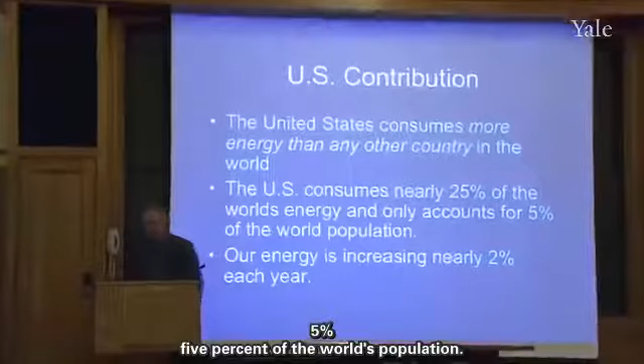Keep in mind also that the U.S. consumes more energy than any other country in the world, and U.S. consumes nearly 25% of the world's energy and only accounts for 5% of the world's population, so that our energy demand is increasing at about 2% per year.

So why might that be? I mean, obviously we're changing our behavior, we're changing our technology and our dependence on technology, and also the environments that we shape around us have enormous implications for energy that often are not well understood for a variety of reasons.

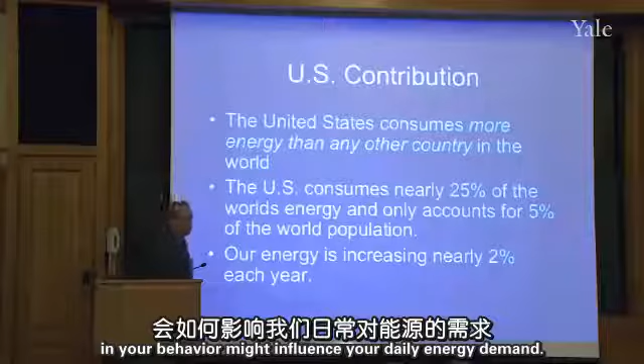You, for example, probably have no understanding of how your daily behavior and variability in your behavior might influence your daily energy demand. The way that you manage your computers, the way that you manage your windows, your air exchange between indoor and outdoor environments, the way you manage lights, whether or not you have a car on campus. If you do, how often you use it, where do you park it, what's its fuel efficiency. So thinking about how to keep track of an individual's energy demand is really not in most people's minds clearly defined.

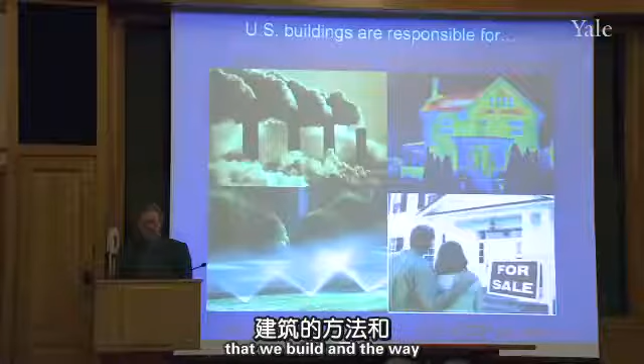As I just said, the contribution to the climate change problem and our dependence on foreign oil is really very much dependent upon the way that we build and the way that we set up standards to encourage energy efficiency. So 39% of CO2 emissions come from the building sector, 40% of total energy consumption, 13% of water consumption, and about 15% of the gross domestic product per year is associated with the building sector.

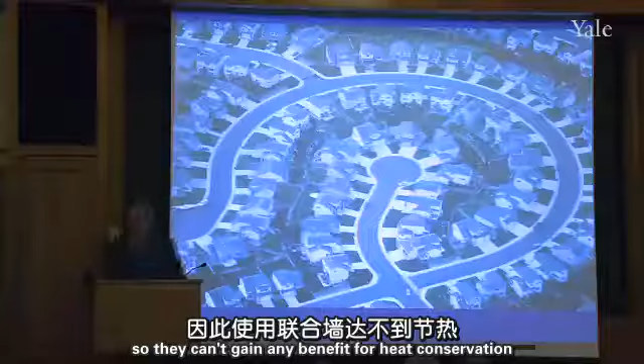Think about the different patterns of growth and how the different patterns of growth and neighborhood development influence the way that we use energy. These houses are not connected, so they can't gain any benefit for heat conservation by having joining walls. They all have their own yards.

And in fact, if you think about how people move around in these kinds of neighborhoods, you'd realize that because of the fencing in the backyard and without gates that go between all the different lots, it would be quite normal for somebody to get in a car and then drive all the way around the block to take their kids to somebody else's house that might be less than a baseball throw away. So patterns of development encourage patterns of transit that have just an enormous influence on the way that we consume electricity, but also petroleum products.

So think also about the cities in the nation that during the 1990s and over the past decade have experienced some of the most rapid rates of growth.

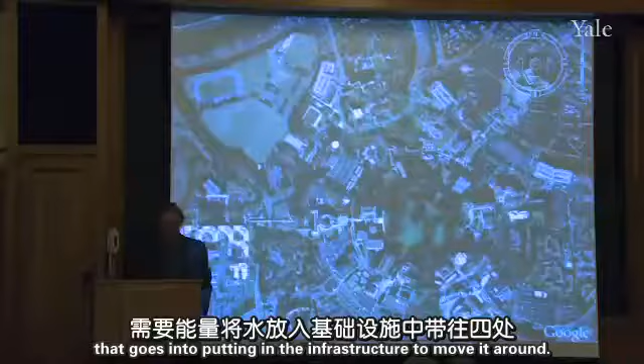These include Las Vegas, which is expanding into the desert in a manner and at a density that is suburban, it's sprawling. But it's unusual in Las Vegas because of the arid environment, so that every house would likely have a lawn. The lawn would require sprinkling. Many of these houses, once they're built out, would also have swimming pools. So think about the way that the use of water demands energy to not just move it around, not just the distribution, but also filtration, and also the energy that goes into putting in the infrastructure to move it around.

On Thursday, I'm going to come back and talk more about the New Town movement in the United States and this problem of managing growth at a larger scale than today's lecture, which is really focused on individual buildings. But it is interesting that a movement evolved in the 1960s and 1970s in the United States to design neighborhoods, to design whole new communities in a way that would take into account some of these problems.

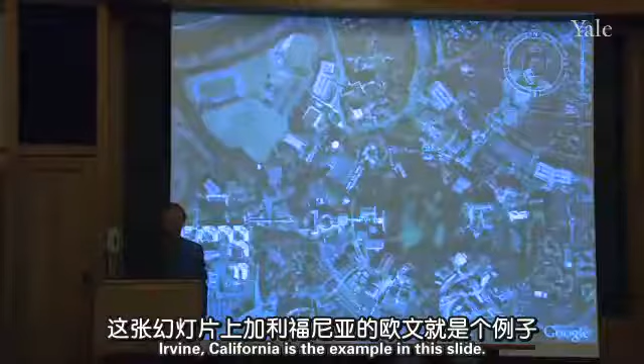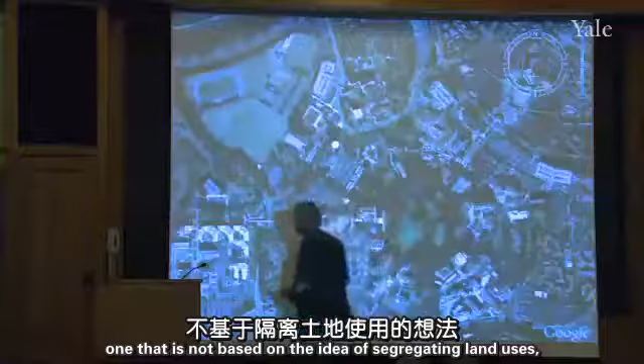Irvine, California is the example in this slide. You can see the center of the campus, with large academic buildings surrounding a green in the center. In the adjacent areas you have recreational facilities, but also higher density housing nearby. It's a very walkable community, one that is not based on the idea of segregating land uses, commercial versus residential versus industrial versus recreational, the way that in suburban Connecticut you put your kids in a car and drive from where you live to where you work, to the recreational area, to dance lessons, whatever it is. This community was intentionally designed back in the 60s and 70s in a way that would provide for mixed land uses and offer opportunities for much increased pedestrian traffic.

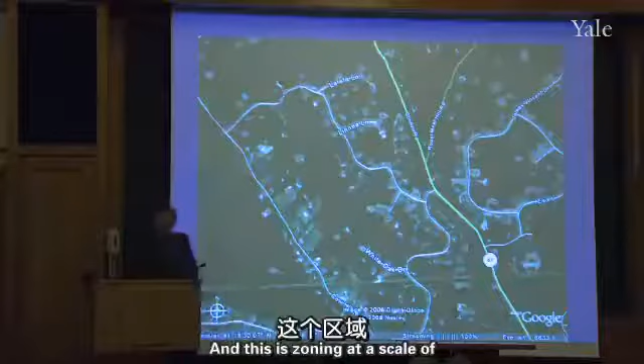As opposed to suburban areas around New Haven, here's an example of a community about 20 miles away that many of my colleagues live in. This is zoning at a scale of about 1 unit per 4 to 5 acres. Each of these houses has a strip of land that reaches back from it into an area that might otherwise be a common open space. This low-density development demands even more time spent in cars and more fuel. A good example of a house in a more rural part of Connecticut.

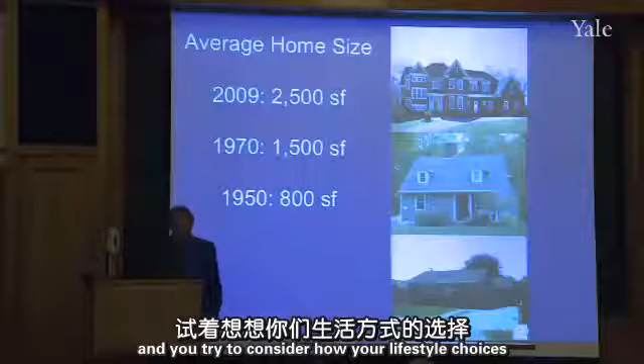So keep these things in mind as you're thinking about your own behavior, the way you grew up, and try to consider how your lifestyle choices influenced your family's consumption level.

Also, I want you to think about the idea of size and how we are increasingly dependent upon many consumer products in our lives that are larger than they used to be, and housing is no exception. The average house size in 2009 has grown to about 2,500 square feet, with about 2.3 people per house on average. That's really pretty remarkable.

Roughly 1,000 square feet per person, whereas back in 1950, the average number of people in a house was much closer to 3, a little bit over 3, with a post-World War II baby boom, and a total house size of 800 square feet. So house size has grown by threefold. In 1970, it grew to 1,500 square feet.

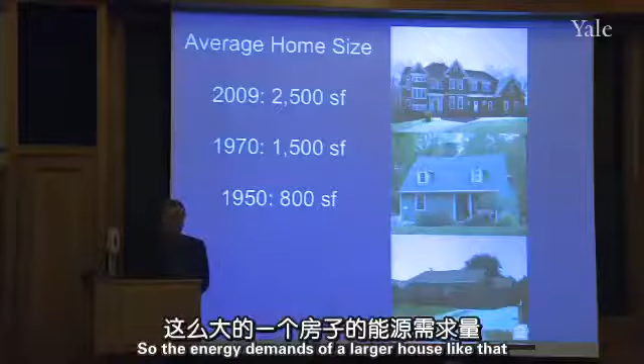So the energy demands of a larger house like that are actually quite difficult to predict if you try to take into account the diversity of building materials.

Boy, I apologize for this—one of you might go outside and let them know there's a lecture going on in here. That would be really nice. The construction is also creating diesel fumes inside the building.

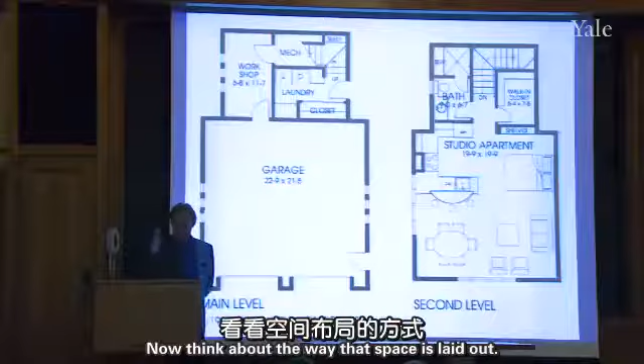Also, many buildings are now constructed with much more glass in them than previously.

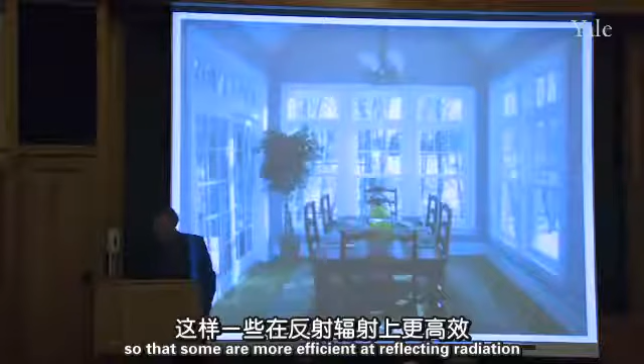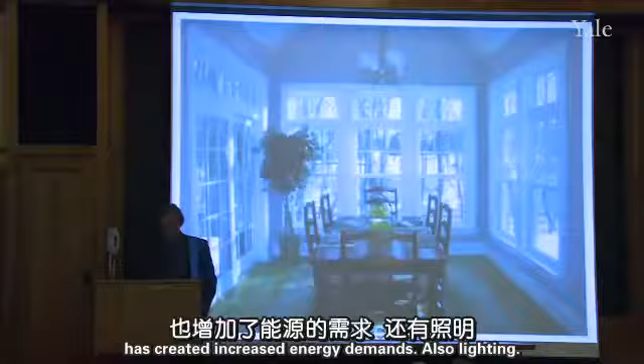The newer high-end buildings are using special glass designed to reflect radiation so that it's not absorbed. Different glasses are designed for different climatic regions—some are more efficient at reflecting radiation and are used in warmer southern climates, while others are more efficient at providing insulation, with a barrier on the interior that protects against heat loss. Overall, though, buildings' increased use of windows has created increased energy demands.

Also lighting, and also the way we have increasingly designed bathrooms to have more than one fixture. Here's an example of a shower stall with multiple shower heads and multiple faucets, so water demand is often increased in bathrooms designed like this.

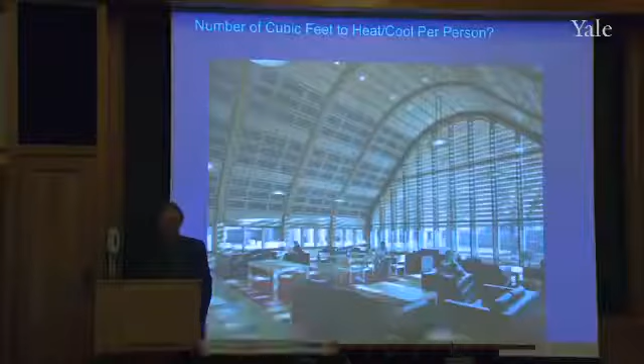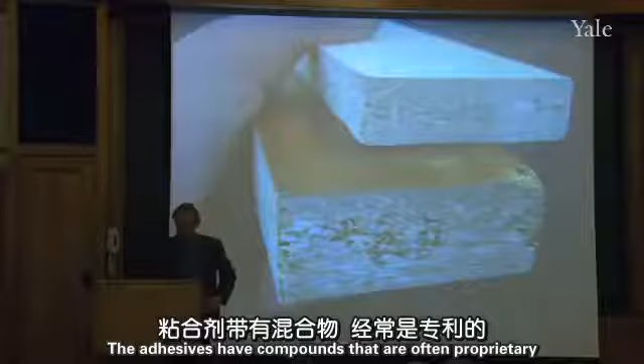So what's beneath the veneer? Here you can see a strip of press board faced with a white oak surface, but the interior is basically low-grade wood chips of a variety of different species compressed together. They're mixed in liquid form with adhesives, then rolled out on a strip and cut into different sizes. The adhesives have compounds that are often proprietary and even unknown to most who purchase or sell them at building supply houses.

They commonly contain adhesives that are epoxy resins, some of which contain bisphenol A, which we talked about earlier in the course. Formaldehyde is also a component commonly used, which is an allergen and a suspected carcinogen. I'd like you to think, too, about the problem of your understanding.

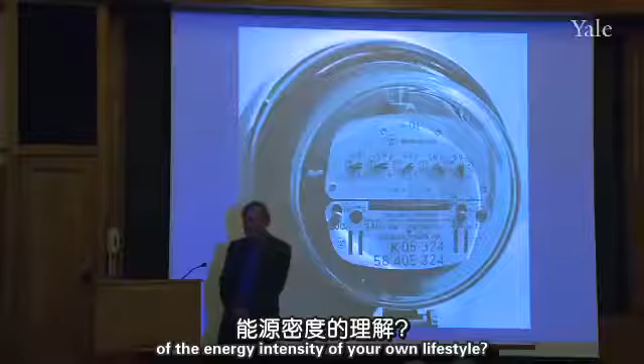How could you increase your understanding of the energy intensity of your own lifestyle? Here's a pretty good example of how houses built in the 1990s and earlier are metered, at your utility junction box where the line comes in from the road. This is my meter—I have the same brand—and it's got five dials on it.

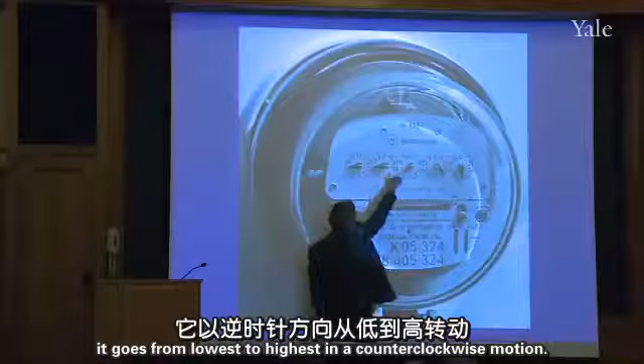You might think that's not that tough to figure out, but if you walk up to it, you'll see the dials actually have numbers where the first dial on the left goes from lowest to highest in a clockwise motion, but the second goes from lowest to highest in a counterclockwise motion. So they switch as you move across. This is actually a very difficult thing to keep track of.

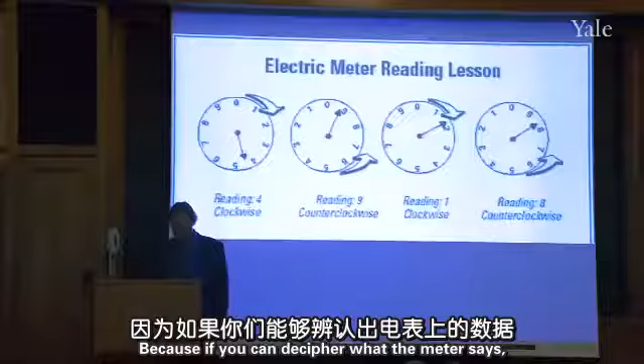You might wonder how your variance in behavior—how you manage your computers, lights, water consumption, or how big a refrigerator you have—affects your electric bill. It's really hard to figure out given this kind of metering system, because if you can even decipher what the meter says, you'll only get a total figure for your consumption. This has created an opportunity for people to design smart meters that keep track of energy intake and use, and how it's distributed in a house for different purposes.

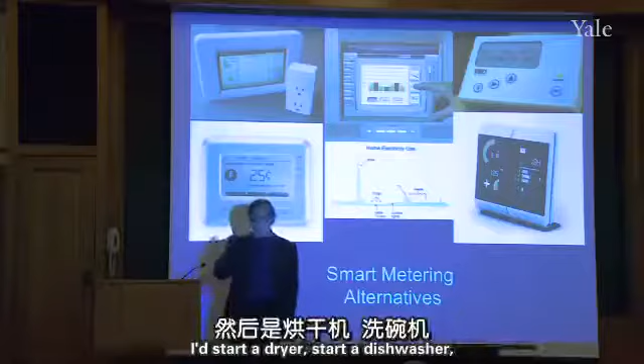I tried to figure this out given my dial meter at home, and ended up turning off absolutely everything in the house and then starting up appliances one by one—starting the refrigerator, then turning it off, starting a dryer, starting a dishwasher, but only one appliance running at a time. Every time you plug one in, go out to the meter, take a reading, come back, unplug it and plug in something else, it takes a very long time to figure out where you're spending your money.

By doing that over a period of about 8 hours, I was able to save about 25% of my average monthly energy bill by figuring out how to restrict access to or fully turn off different appliances in the house.

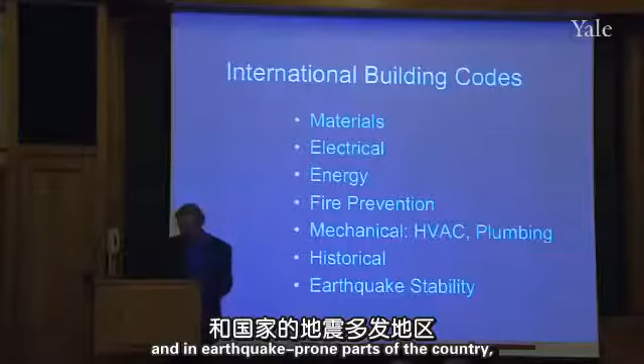Building products and building construction are normally regulated by a variety of building codes, many of which have been adopted internationally. These codes apply to materials, electrical systems, energy sources, fire prevention, mechanical heating and ventilation and air conditioning systems, plumbing. They even apply to historical sites, and in earthquake-prone parts of the country, there's a distinctive code, like in California, for earthquake stability.

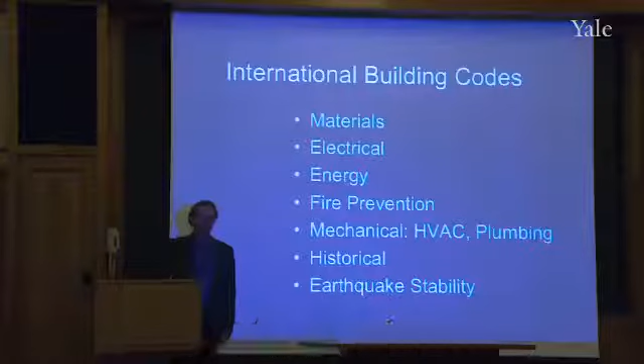These codes evolved originally as voluntary, so they were not formally adopted by state or local governments, but now most states have similar kinds of building codes. They were originally designed to promote understanding of the functionality, safety, and durability of different kinds of products, also to promote truth in labeling, but they were never really designed to promote environmental responsibility, health protection, or energy efficiency.

So the green building movement was really ripe for a brand new certification system that would apply a variety of different kinds of standards. The three programs I'll mention today include the LEED program by the U.S. Green Building Council, the BREEAM program in the United Kingdom, and the Green Star program in Australia.

The BRE Environmental Assessment Method is perhaps the best known in the world right now, and it's the most widely adopted throughout Europe. It sets standards for best practices in sustainable design and has become really a de facto measure used to describe a building's environmental performance within the European Union.

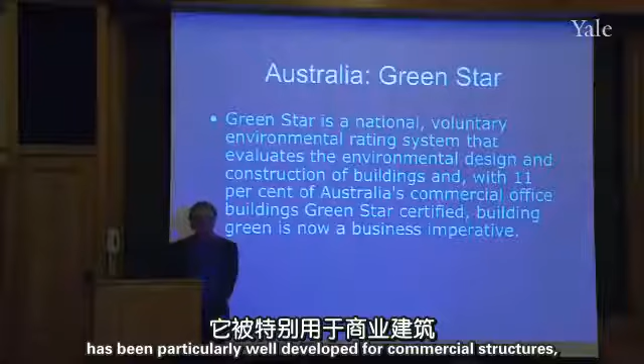Australia has the Green Star program, which is national. It's also voluntary, and it evaluates construction and environmental design. It's been particularly well developed for commercial structures, especially office buildings in downtown districts, where about 11% of buildings have been constructed and certified under the program.

Its purposes are, first of all, to try to figure out a common language and common definition for what green is. Before the National Organic Food Standard was adopted, there was no national consistency in the definition of what organic food was—it varied by certification scheme.

The Green Star program also sets measurement standards, so there's a common approach to measuring, say, energy consumption or the capacity of different building materials such as electrical conduit.

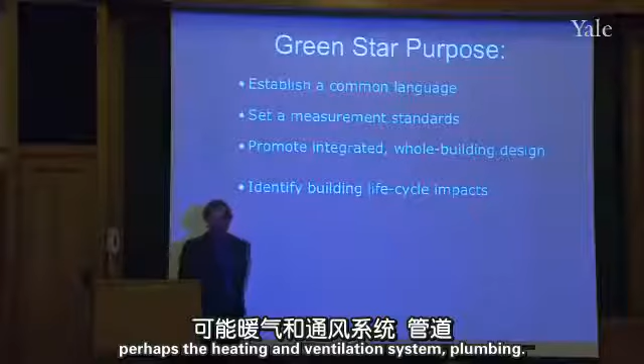They also promoted whole building design, so one would think about not just the individual components or building materials or the different systems—by systems I mean water supply, electrical supply, heating and ventilation, or plumbing—but figure out how to put all these components together in a way that would minimize the long-term adverse effect on environmental quality, human health, or energy loss.

This idea that one would think about building materials and the style of design in a way that would consider the ultimate product life cycle is really a pretty new idea in the building industry. So what's going to happen to that PVC pipe that exists in your house when your building gets torn down? What's going to happen to the copper piping that delivers the water?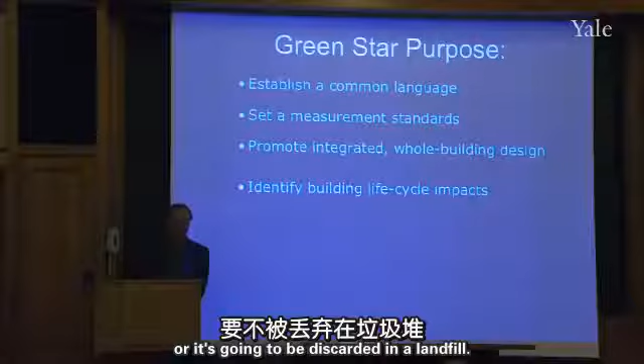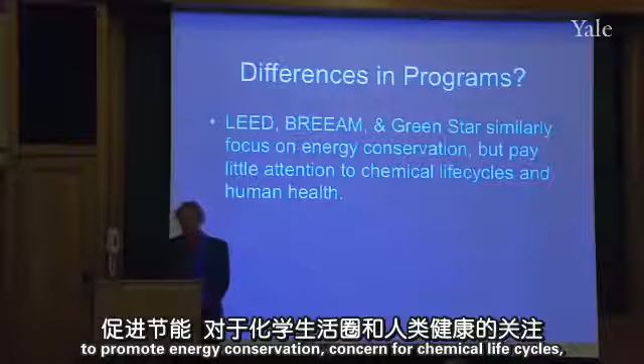The PVC pipe, you can almost be assured, is going to be either burned or discarded in a landfill, but the copper piping is highly likely to be recycled because of its market value. Differences in these programs are normally associated with the way they allocate credits or points to buildings for different purposes, but they're quite similar in their attempt to promote energy conservation, concern for chemical life cycles, as well as human health.

The Green Building Council evolved beginning in 1993, and this is what I want to focus on now for the remainder of the session. It's a voluntary, nonprofit organization with no government affiliation, although it was started by a grant from the U.S. Energy Department. It was created with a board of directors that includes people with expertise in architecture and engineering, as well as some of the largest development and construction firms in the nation.

There are really not a number of people on this board or on the staff that have deep environmental or health expertise, and its orientation has predominantly been to promote energy efficiency.

They claim that the benefits of Leadership in Energy and Environmental Design, which is what the LEED acronym stands for, has three predominant purposes. One is to promote environmental quality. The second is economic development, to basically stimulate a new type of building and new building materials that are more environmentally responsible.

And also to promote healthy lifestyles within buildings and communities. By healthy lifestyles within a building, I'll give you one example.

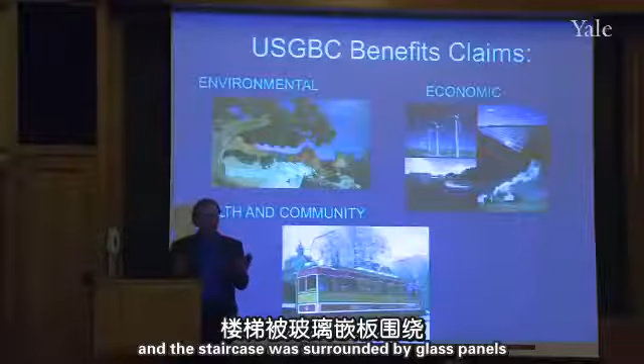A colleague of mine works at the Centers for Disease Control in Atlanta, and they have a relatively new building. As a healthy lifestyle attribute, instead of putting a staircase in the back of the building and the elevator right near the front door when people walked in, they decided to reverse that. The elevator was put in the back, and the staircase was surrounded by glass panels that made it really light, with sunlight streaming through and attractive, so that people, when they go into the building, normally walk up the stairs, in a 7- or 8-story building.

This individual who directed the National Center for Environmental Health told me that he and his staff, nobody uses the elevator. Everybody goes up and down the stairs, so it saves energy. The elevator's not used much, and it's also healthy. It's burning up calories.

The purpose of LEED falls into a variety of categories. One is sustainable sites, another is water efficiency, another is energy and atmosphere, another is materials and resources, the fifth is indoor environmental quality, and another is creativity and innovation in design. You might imagine different categories might be a part of a system such as this, but there are interesting questions about the relative importance that these categories should be assigned.

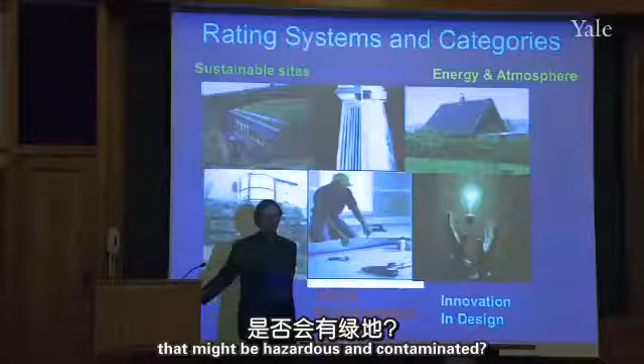Should you be assigned as much about the nature of the site that's chosen for building, whether or not it's remote and is going to be in a greenfield area, as opposed to a site that might be hazardous and contaminated? Kroon Hall, up on Prospect Street across from the Whale, was built on a highly contaminated site, where a former power plant was located.

A lot of work had to be done to clean that site up, to remove contaminated debris, as well as other infrastructure, the heating and electrical and hot air conduits that go from the power plant up to Science Hill, particularly Kline Biology Tower.

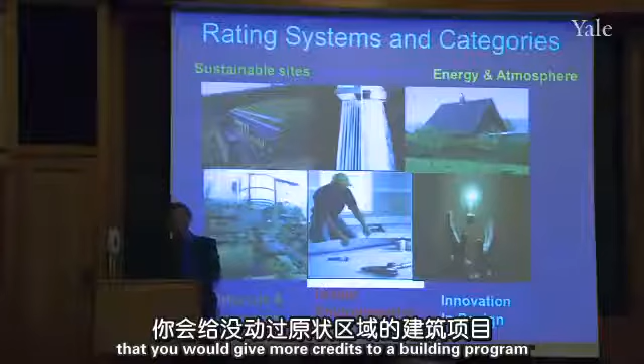So the idea is that you would give more credits to a building program that would not chew up undisturbed areas that are in, say, the suburbs. You'd give more credit to those that were actively going to restore sites - that's an interesting concept.

The certification program that I'm going to talk about today has to do with new construction and renovation, although there are other programs that LEED has, for example, a program for schools, a program for homes. In this program there are 100 base points plus 10 possible bonus points, and there are different levels of certification that can be achieved.

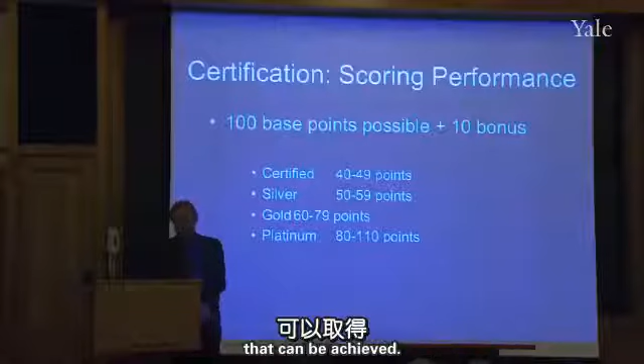If you achieve 40 to 49 points, you are certified. Up to 50 to 59 points, you're given a silver certification. Gold is 60 to 79, and then platinum is 80 to 110 points. You could imagine a variety of different strategies here that would hold the bar higher for the base level of certification, or perhaps hold the bar higher for only the platinum level. The Kroon building was just certified to be a platinum building as an example.

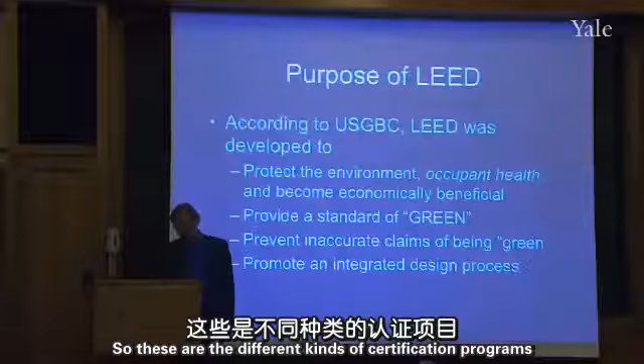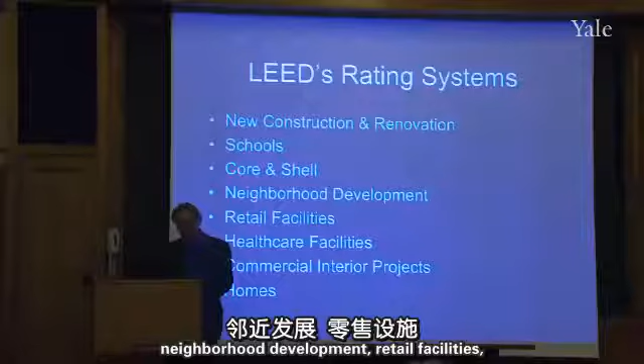These are the different kinds of certification programs that LEED has beneath its umbrella. As I mentioned, the first one, new construction and renovation, is the subject of today's talk. But there's also schools, core and shell components of buildings, neighborhood development, retail facilities, healthcare facilities, commercial interiors, and homes.

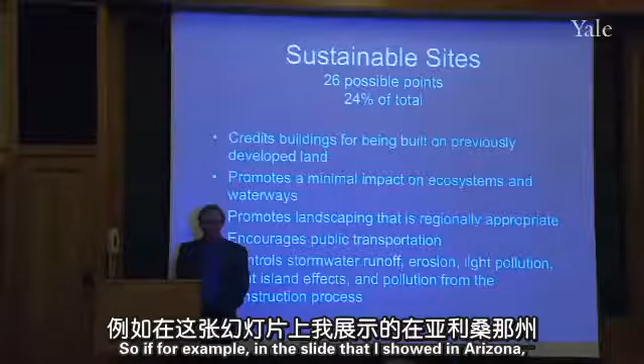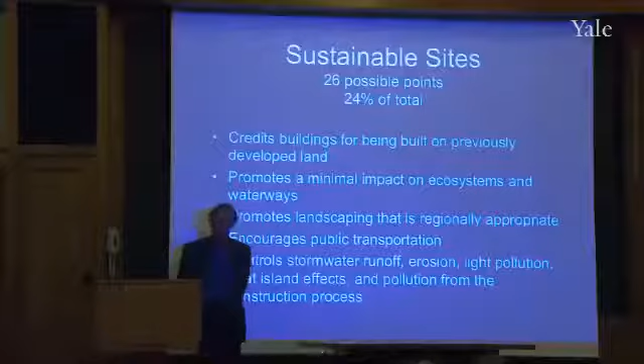For example, in the slide that I showed in Arizona, if you were trying to get LEED certification for a new project, you would need to be very careful about the kind of landscaping that you put in, making certain that it wasn't water dependent. Whether or not the building site encourages access to public transportation, so proximity, say, to a rail station, would improve the number of points. The control of stormwater runoff and erosion - as an example there, Kroon Hall has a very large gutter that overhangs the south side and funnels water down into that water garden that is on the eastern side of the structure.

And then that water moves through a filtration plant inside the building and is recycled into gray water, so that it's used for removal of human waste in the bathrooms.

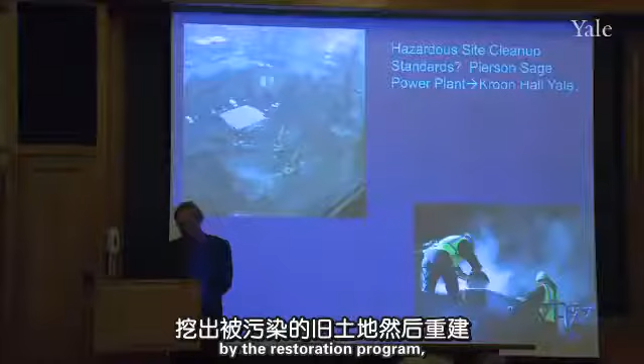Here's an example of how that building achieves certain points through the restoration program, digging out the old contaminated lands and rebuilding. For each of these categories, you can achieve points in different directions, and the way these points are allocated category by category could have a significant implication for providing encouragement.

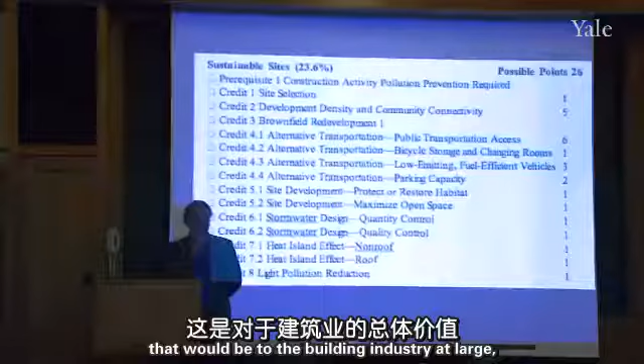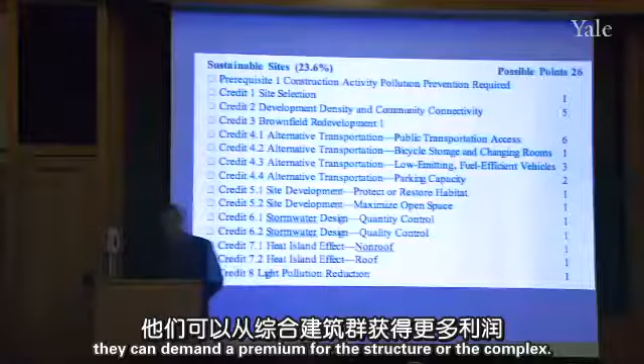By the way, why would a developer want to be LEED certified anyway? What's the value? Well, one value would be to the building industry at large, creating an incentive for a new line of products and a new approach to building design that would create jobs and cause the industry to grow generally. But most developers are in this because they know that if they achieve certification, the property value is higher—they can demand a premium for the structure or the complex.

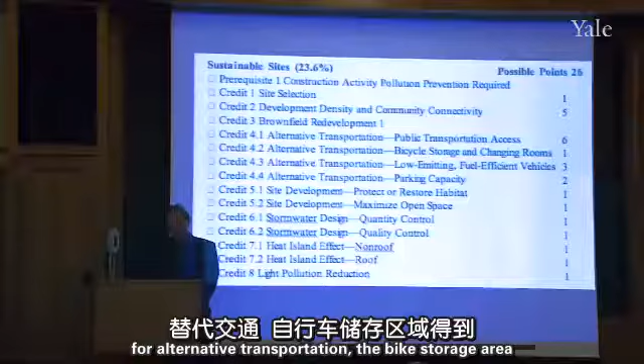In this case, the sustainable sites category allows one to seek about 23% of the total number of possible credits. These can be awarded for brownfield redevelopment, for alternative transportation like the bike storage area you find behind Osborne Laboratory, which caused FES to gain additional points, and for management of stormwater and trying to reduce the heat island effect by creating green roofs. There's a green roof on part of that site.

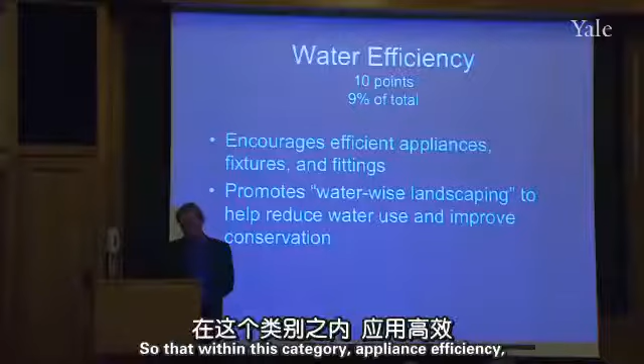Water efficiency also is a source of possible points, about 9% of the total. Within this category, appliance efficiency, fixtures and fittings are good examples of different ways of saving water, as well as the landscaping I mentioned earlier.

I wanted to mention a couple of relatively recent technological designs. One is these leverless faucets that sense your presence either by an electronic eye or by sensing heat, which causes them to turn on and off.

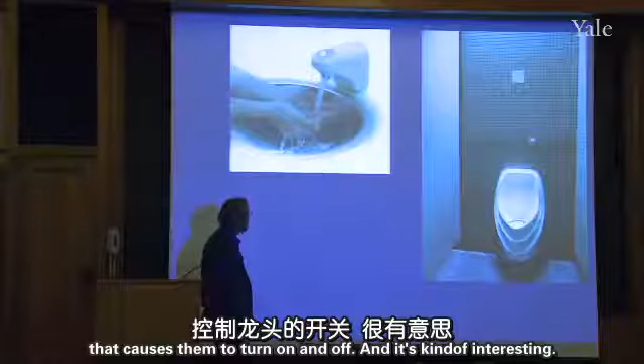I've become more curious about this and watch people's hand washing behavior, particularly in places like airports. It's really common to have a whole array of these faucets on a countertop, and people often have to move from one to the other to get one to work. After that happens a number of times, I think people are more likely just to not wash their hands, so there's a sanitation problem potentially associated with it.

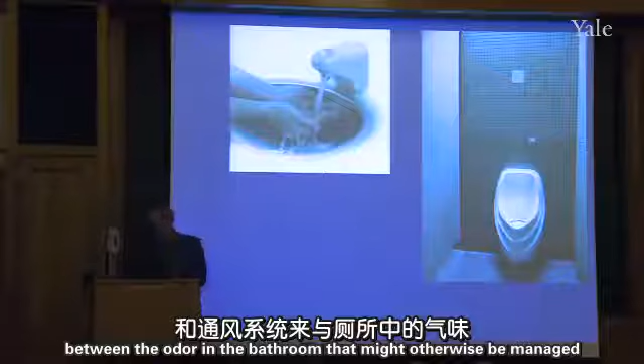If you go into the men's rooms and look at the flushless urinals, you'll immediately recognize there's a serious problem in Kroon. It's led many to argue they'd rather make the trade-off between the odor in the bathroom and improving the heating and ventilation system. Right now, no water is used in this toilet—only a synthetic compound is put in to try to maintain its sanitation, but it often isn't as effective as promoted.

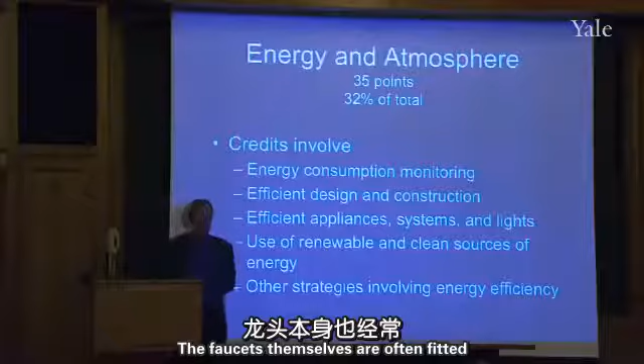Water efficiency can be achieved in a variety of ways. The faucets themselves are often fitted with restrictions in flow, so if you're interested in taking a more powerful shower, you'll need to figure out how to get the flow restrictor out, which many people do try.

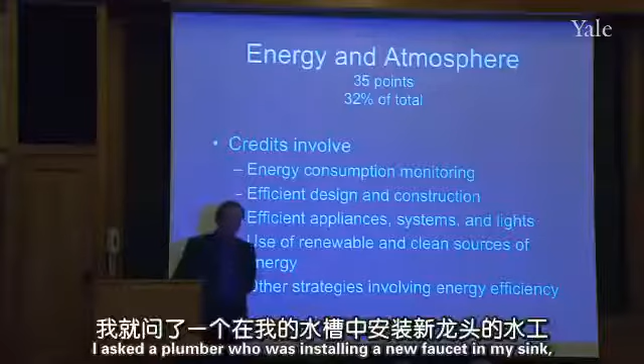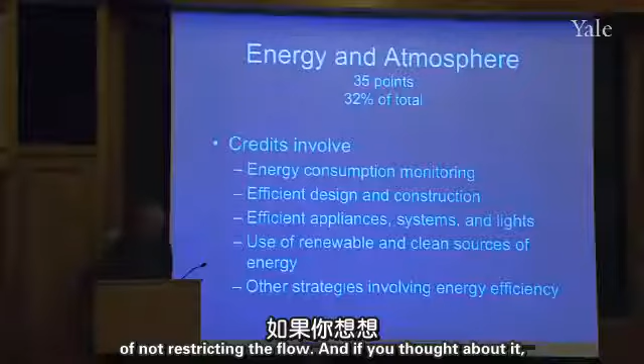The flow restrictor itself is governed by local and state building codes, and it was an education for me when I wondered about this. I asked a plumber who was installing a new faucet in my sink, and I said I'd really like a larger rate of flow so I could be more effective in washing dishes or whatever. He said, well, you really don't understand the energy implications of not restricting the flow—if you thought about it, you'd realize the energy costs are really quite high to move the water to your home.

I said, well, I've got my own well. He said, well, think about where the energy is coming from that causes your pump to lift the water 600 feet.

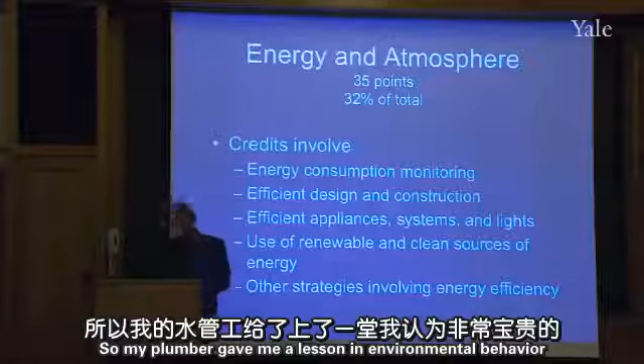And think about the more water that you use, the more waste you create, so you're likely to disperse biological and chemical contaminants more broadly. So my plumber gave me a lesson in environmental behavior that I thought was quite valuable.

The highest proportion of points or credits are awarded under the LEED program for energy and atmospheric concerns, so that new buildings can obtain points by monitoring energy consumption, and this is being pretty carefully done in Kroon Hall as an example.

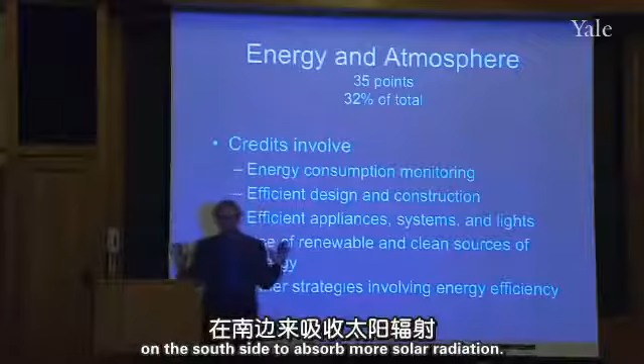The orientation of the building at Kroon is facing east to west, so that it has more window space on the south side to absorb more solar radiation. It also has solar panels that run across the south side, and a variety of other saving techniques.

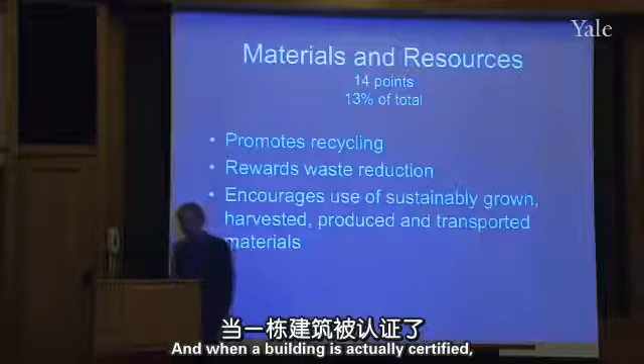So the dominance of energy and energy conservation in the LEED certification and credit program relative to these other categories is quite interesting. With respect to materials and resources, the management of waste is also more intensely monitored within a LEED certified building.

And when a building is actually certified, it's not certified forever. It's certified for a fixed period of time, often only a single year. A building is not certified until it can demonstrate that it performed at a certain level during that year. So it's kind of an interesting idea. If a building's heating and ventilation system malfunctions, then a year or two down the road, it's not going to be recertified.

Indoor environmental quality is increasingly a concern, and only 15 points compared to about 34 points in the energy category are allocated for indoor environmental quality. Now, what does that mean?

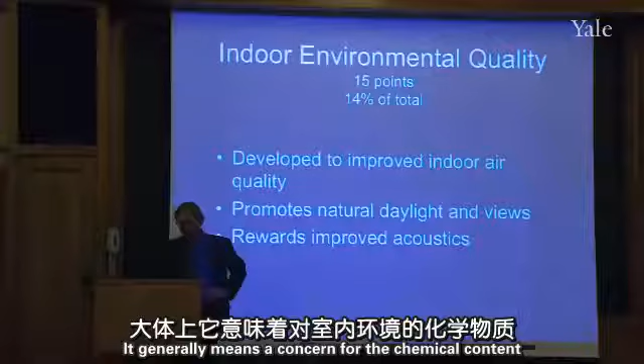It generally means a concern for the chemical content of the indoor environment. But it also includes the opportunity to gain points for natural daylight and views, and also for acoustical control, noise control, so that the situation we're experiencing here might be avoided.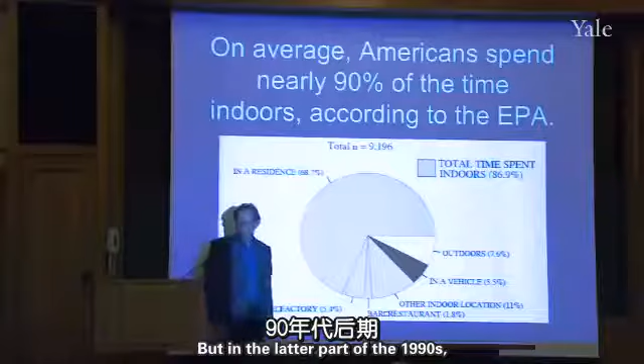Think about the importance of this in terms of human chemical exposure, given the fact that we spend so much time indoors. This diagram is now a couple of years old, but in the latter part of the 1990s, EPA was estimating that about 86-87% of time was spent indoors. About 5% of time was spent in a vehicle. So thinking about the chemical content of the indoor environment is important, especially for certain subgroups like kids.

This can be managed in a variety of ways, and you could think the ventilation rate or the air exchange rate, indoor to outdoor, is one way of doing that, depending upon where your building is. In general, outdoor air quality is better than indoor air quality, unless you live in proximity to an industrial area or a highway, so that being able to mechanically and individually control windows is an important strategy for managing air quality. But also thinking about a variety of different materials and compounds that are brought into the built environment.

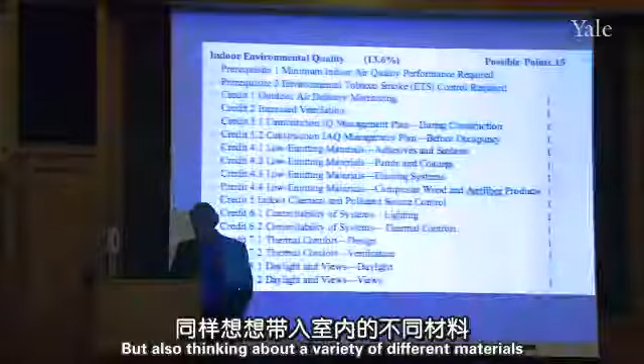Some compounds and some products are discouraged under this program, so that paints, for example, that emit a high level of volatile organic compounds are discouraged. Low-emitting paints, varnishes, and polyurethanes are now designated, so that if you look at the can of an oil-based paint, you'll find that roughly 2.5 pounds of volatile organic compounds are contained, whereas certain paints are now manufactured with no volatile organic compounds.

You might also think about compact fluorescents, which pose an interesting problem in that they contain mercury. This is a piece of personal advice for you: as you install or remove compact fluorescents, be really careful about them, because if they break in your room, it's going to scatter mercury around, and the mercury will vaporize. If it gets into a rug and you vacuum, the rug is going to give off the mercury vapors, and it will increase the volatilization rate, making it just about impossible to completely remove the mercury from the room.

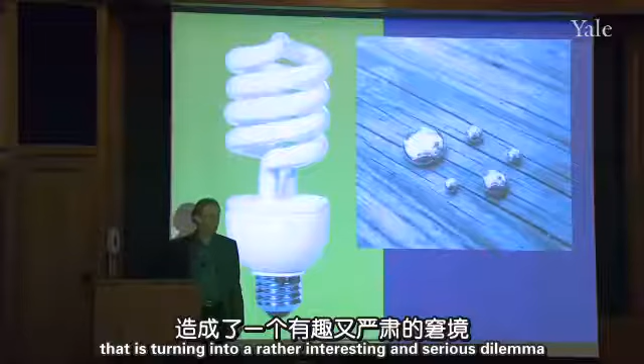This is a problem associated with compact fluorescents that is turning into a rather interesting and serious dilemma for waste management. Not many people really want to take an old burned-out light bulb back to a recycling center, and the probability of getting it there without breaking it is probably not too great. Also think about plastics in landfills — an increasing proportion of the interior built environment is made up of a variety of plastics that we've talked about in the past.

But the extremely low chance that plastics are going to be recycled is a logic to rethink the way that points are allocated. There was an interesting debate inside the Green Building Council about polyvinyl chloride plastics, and whether PVCs ought to be banned, or whether you'd have credits removed if you used PVC as opposed to a more recyclable product like polyethylene, which most soda bottles are made out of. But they decided not to do that, which is quite curious.

So thinking about the kinds of materials put down on floors, the sealants also - this is encouraged. Credits can be gained if you choose not just low VOC paints, but also clear finishes. You'll also find a variety of products, including this type of vinyl flooring you could see in Kroon Hall, particularly in the stairwells, that gives off volatile compounds I haven't been able to identify, and manufacturers are not required to label.

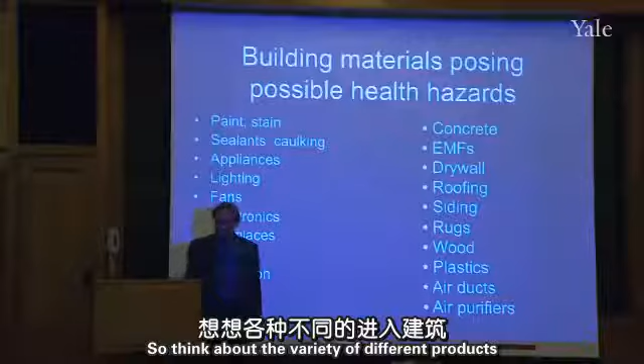So think about the variety of different products that go into purchasing or into the construction of a building, and how these products may change the chemical content of that environment. So the quality of the air exchange system is really critical to govern the chemical exposures that occur, and this is particularly the case in a new building.

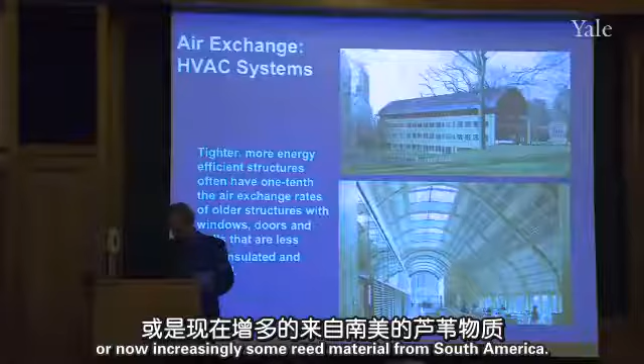As an example, rugs. Rugs may be made out of natural products, natural fibers such as wool or cotton, or increasingly now some reed material from South America. But rugs made out of synthetic compounds and their backing - many are recommending that those be aired out in a warehouse or garage for a period of time, up to a couple of weeks, before they're installed, so occupants of new buildings would not be exposed to those fumes.

A couple of other examples that are not managed by LEED. Certain golf courses have been certified, whereas the expectation on the part of the Green Building Council is that the chemicals used are regulated by the Environmental Protection Agency. And the chemicals used on golf courses are commonly quite a complex mixture. As you remember from the pesticide section of the course, many of these have not been fully tested.

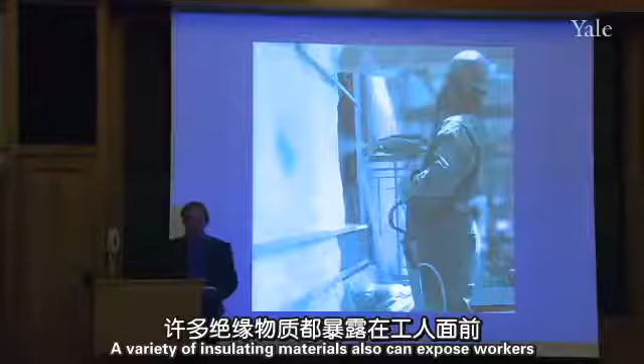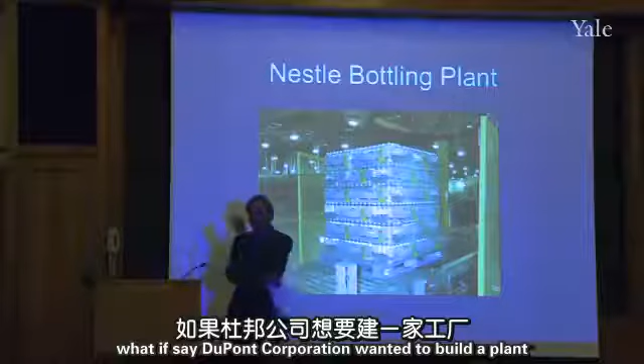LEED has also certified a bottling plant, raising kind of an interesting question. Well, what if, say, DuPont Corporation wanted to build a plant to produce a variety of chemicals that were extremely hazardous, and perhaps they got into water or air or soil? Should they be allowed to get platinum or LEED certification for that structure? Should Nestle be allowed to gain certification for marketing products that are not likely to be recycled?

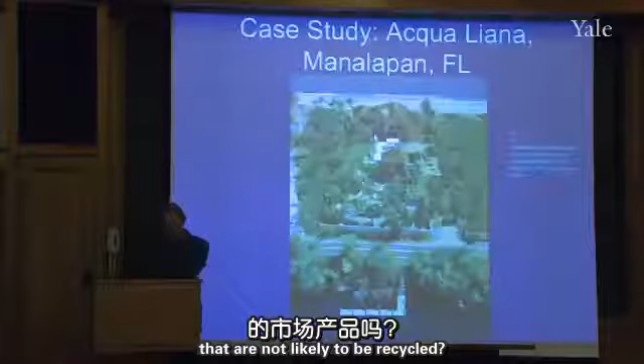Here's another example of a project certified in Florida - remember the lecture last week about barrier islands. Well, this owner owns a tract of land slicing across a barrier island from the bay to the shoreline, and has quite intensively developed it. Seeing the amount of square footage in homes and the low occupancy rates has led me to wonder whether the government might think about regulating square foot per person, or cubic foot per person. How much space do we really need per person?

So I'm going to run through just a few summary findings here before I close today that should give you a sense of what's working and what's not working too well with the LEED program.

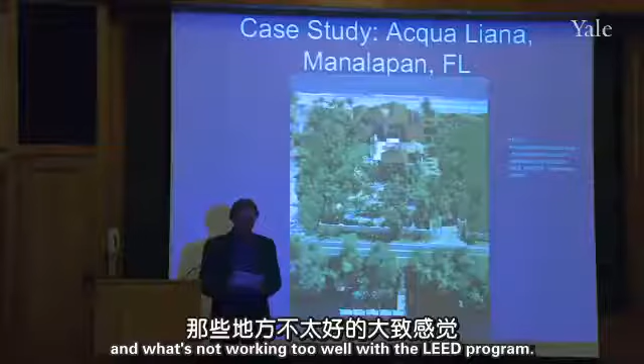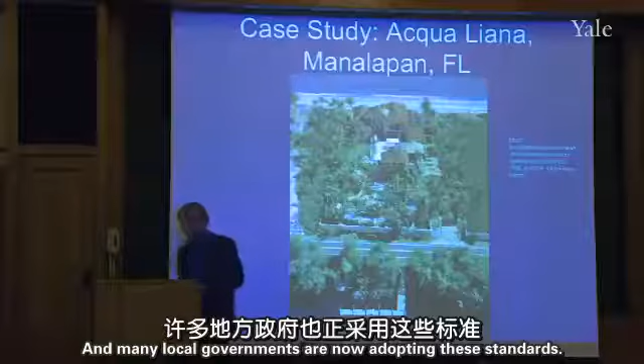These standards have been designed by a voluntary nonprofit organization, but they've been adopted increasingly at all levels of government in law. So they've been added to Connecticut's laws, for example - Connecticut now requires that new buildings costing more than $5 million need LEED certification. Many of the Department of Energy's programs are now designed to encourage giving grants to projects that gain, or would gain, LEED certification. And many local governments are now adopting these standards, so that the standards developed by a voluntary nonprofit organization are really coming to promote a new form of growth and development.

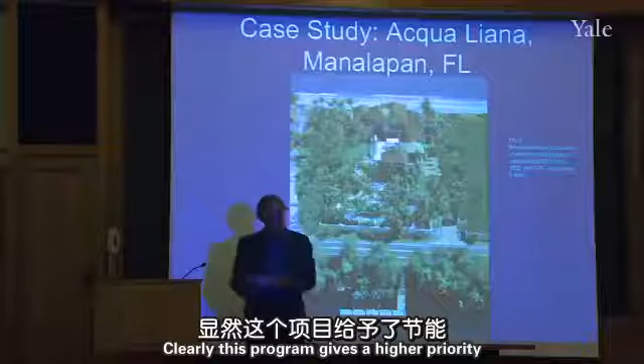But they're being incorporated wholesale into a variety of different levels of government without really thinking critically about what's working well and what's not. There's now no federal definition of what a green building standard should be. Clearly, this program gives a higher priority to energy efficiency over indoor environmental quality or human health.

And if I were going to design a statute that would encourage green building, it would certainly give increased precedence to public health concerns and the chemical content of buildings. The Green Building Council has very little expertise in human health, and that in part explains why these standards are not well developed in that area.

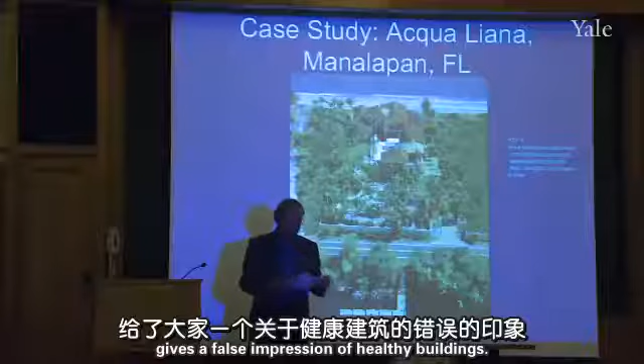Still, the Green Certification Program, the LEED program, gives a false impression of healthy buildings. Tighter buildings are more energy efficient, but tighter buildings also more effectively contain chemicals that get into indoor air. So no level of certification, even the highest level, the platinum rating, assures health protection.

LEED also neglects drinking water, so drinking water supplies are managed in the nation predominantly by the Safe Drinking Water Act and the maximum contaminant level standards. So there is no requirement under LEED to certify, to filter water.

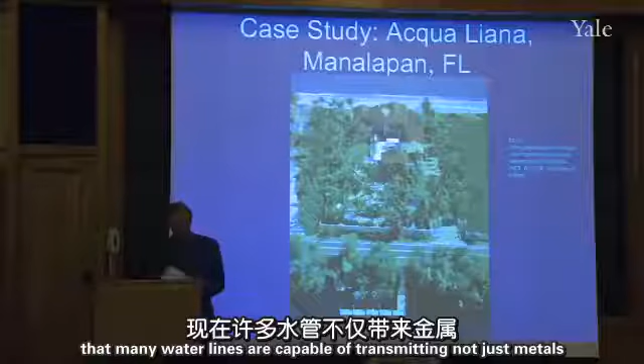Despite the fact that many water lines are capable of transmitting not just metals, but also some of the components of plastics. So the core problem with respect to managing chemicals in the indoor environment and the ultimate life cycle of chemicals has to do with Congress's inactivity, its failure to demand that chemicals used in the building industry be labeled, that they be tested before they're used, so that it's creating a pattern of exposure that really we don't understand well. We know we're being exposed to a brand new mixture of compounds.

So what kinds of recommendations might you think about to improve this system? Well, one would be to simplify the scoring system so that rather than using the platinum, the gold standards, I would prefer to see a scale that was simply a 0 to 100 scale, so that people would not have the incentive just to get to 80 points, which would ensure they'd be awarded the platinum certification.

I think that the categories of certification need to be diversified, so that if the Green Building Council judged and scored a project's performance in separate categories, developers would have an incentive to score higher in all those categories. In other words, set up a separate scoring system for indoor environmental quality and human health, a separate system for energy efficiency, and a separate system for water supply.